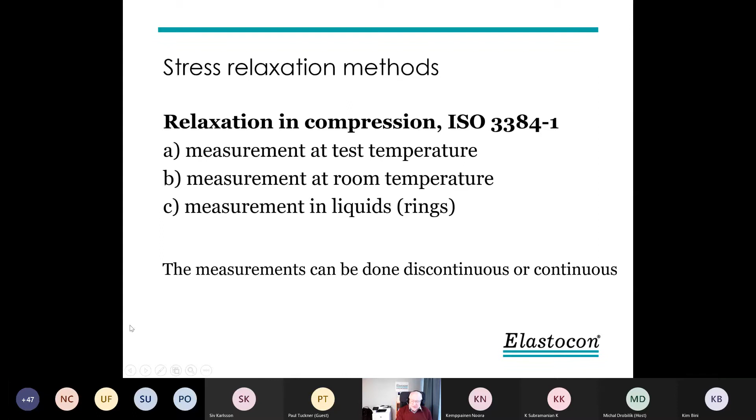So if we look at 6914, that is continuous elongation. That method is in fact called aging. And only method A in that standard is really relaxation, because there we extend the test piece strip, normally 50%, and measure the decay in the force.

Method B in that standard is done in a similar way. We extend the sample, the test strip 50%. We record the force, but then we unload it again, so it's not stretched during the aging time. And at suitable intervals, we extend it again and measure the force at 50% elongation.

And that means we get, in fact, to measure the modulus change. It's not the same as the relaxation. But that is also an interesting thing. It's possible to do in the same instruments, by the way.

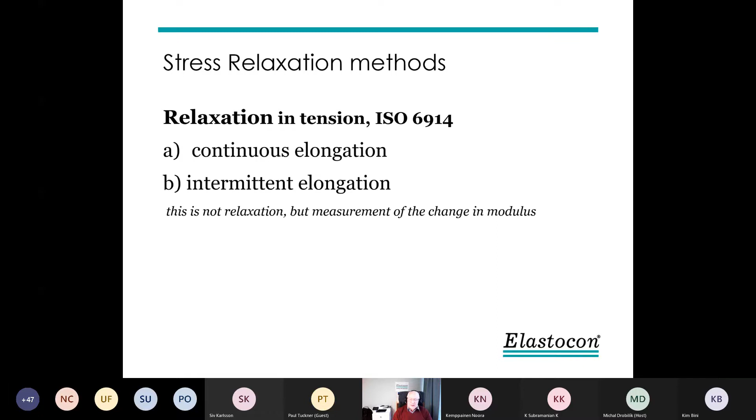If we talk about what happens in our rubber material when we do relaxation tests, or aging, in fact, if we compress or stretch the material, we have first the physical relaxation. That is only a rearrangement of the polymer chains and fillers, which will find new resting positions or places during the compression. And nothing is really destroyed.

It's just the physical. That one we want to get, say, not calculate or count in. We want to look at the chemical degradation due to aging. And the chemical degradation is mainly then that the molecules get shorter. They are affected by thermal aging, oxidative aging.

And it corresponds quite well if you do tensile tests and look at the elongation at break. The elongation at break, if you age some rubber material different times, it always goes down, becomes lower, and that reflects the shorter molecular weight of the aged material.

But in rubber, we have another thing. We can also have some continued cross-linking. If we have not cured the material properly before we do the test, we will also get some extra crosslinks in the compressed state. And that is affecting the result, of course, but not so much as it will affect the result if we make compression set, because there you see it much more.

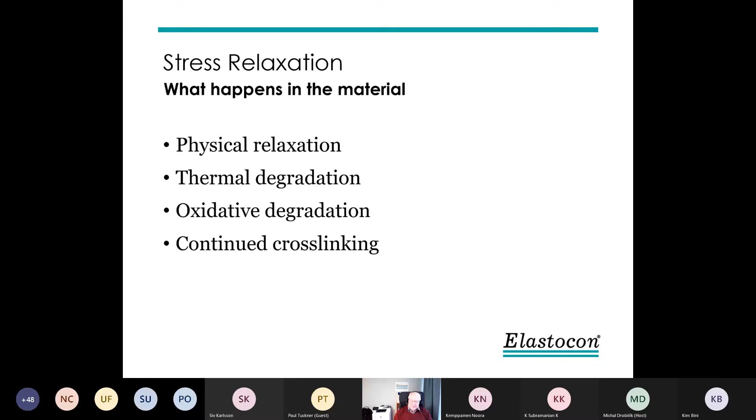The relaxation test was developed in England, and it was standardized in ISO during the 1980s. There were really no instruments at that time for doing this test continuously. I was participating in that standard group, and I worked at the National Testing Institute in Sweden. We found that the best thing is to measure continuously and not discontinuously, because then you get much more errors.

So this was the first design of a continuous test rig. And of course, we also needed a heat source, and we used a cell oven for that purpose. But the cell oven had quite small and deep cells, and it became quite long.

We even started without, let's say, computer software. This was in the early 90s. We recorded on a tape strip recorder, and the longest test we made was 1 year. I'll show that later on, which we recorded on a strip recorder on paper, running at the lowest speed, but still it was a lot of paper to look through after 1 year.

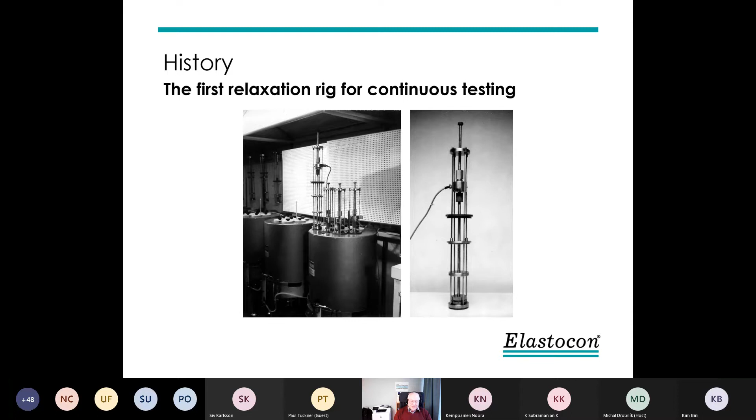The instrument at that time was developed by Wallace in England and was measuring in the test fixture. You see one in the picture here, where a load cell was fitted to a pneumatic cylinder, more or less, and compressed the sample inside the test rig a little, so it didn't have any connection with the spacers anymore.

According to that method, it's allowed to do a little extra compression to get the sample free of the spacers, so the counterforce can be measured. But it is very tricky to get repeatable results.

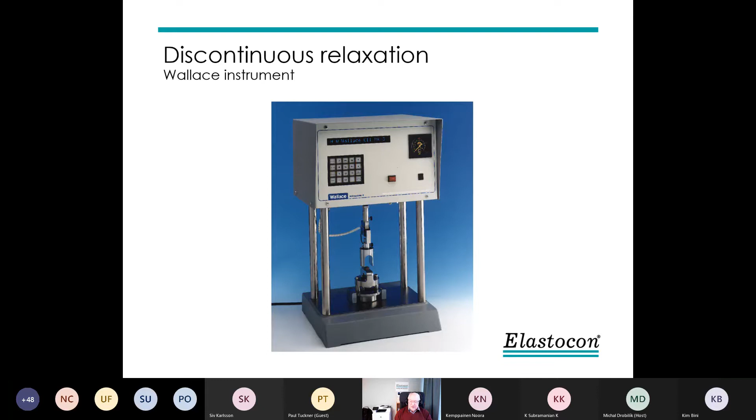That test rig is then put into an oven to make the aging at an elevated temperature, and taken out at suitable intervals. Quite a lot of manual work, and quite a lot of errors can be introduced.

At Elastocon, we developed a similar instrument, but we found some important factors. One was to compress the sample to exactly the same compression every time. We made what we called a compression tester, where we could compress the samples to within 1,000th of a millimeter, the same every time, so we could get more repeatable results. But we have discontinued making this because there is very little request for it.

Method B is also used quite a lot today, measuring in a tensile tester. If you have a modern tensile tester, the elongation measurement is good enough, but in older instruments they are not. You must be able to measure in the range of 1,000th of a millimeter. We'll come to that later on. To the right, you see a test jig for this kind of measurement.

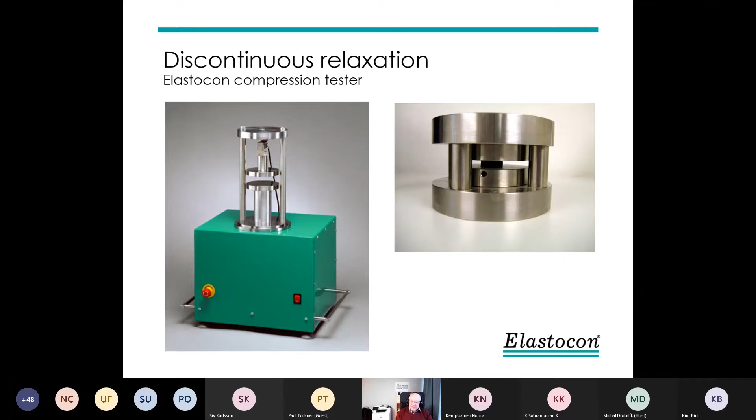Here is a graph from the SAE standard, where this intermittent test is described with a test jig similar to the one we saw before. The way of determining the force is that you measure the force while you make a further compression.

When the rubber sample doesn't have any connection or touch with the spacers anymore, you get another curve, and you take the value as indicated here. The first steep part of the curve is the metal deformation you are measuring, and then it's the rubber deformation. This can be done if you have a tensile tester with a good measuring system.

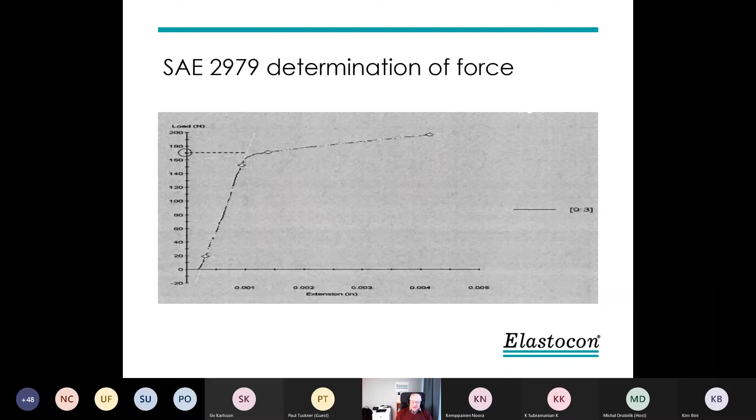The continuous instrument is also a kind of tension-compression rig, but it's compressed manually, because we only need to compress it once when we start the test. We have a load cell and a PT100 sensor connected to an amplifier box to get the values into a computer.

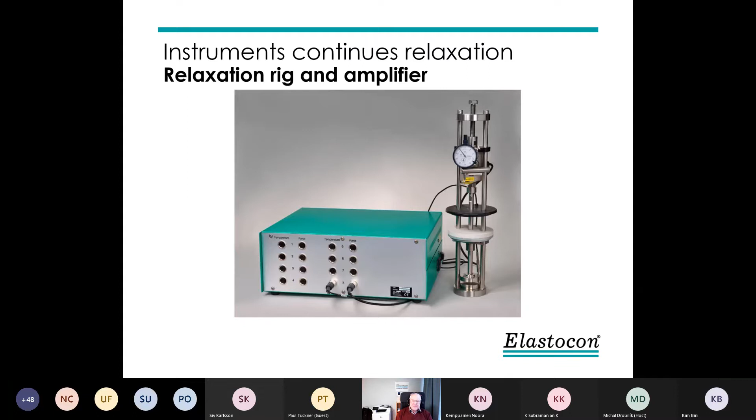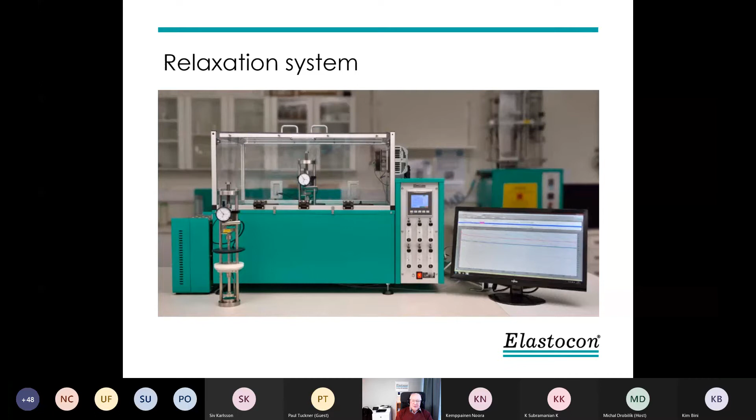It's possible to test in several ways. Compression is the normal one, you see the first. If you test in tension, we use a strip and clamps. And then to test in liquids, we have containers. There are 2 versions of containers.

You can use ones that are not airtight, meaning you cannot test volatile liquids or at high temperatures. Later on, we developed airtight containers up to 3 bar pressure, so it's possible to measure oils, fuels, liquids, and also water up to 145 Celsius. That means 3 bar is the maximum pressure limit we have.

It means we can do method B, where the measurements should be done at room temperature and the aging at higher temperature, automatically—so we don't need to take the test jigs in and out of an oven and do manual measurement.

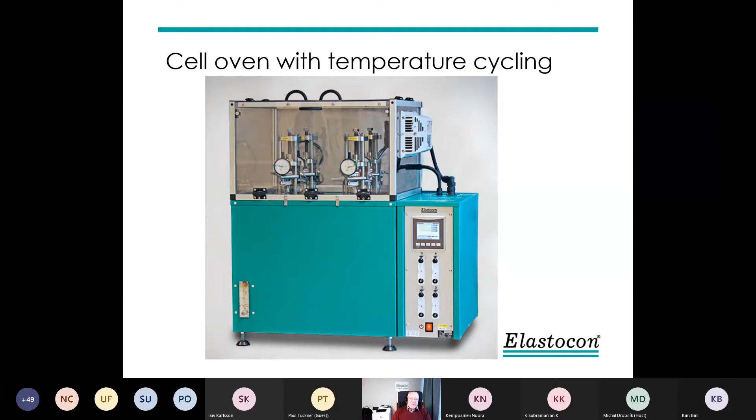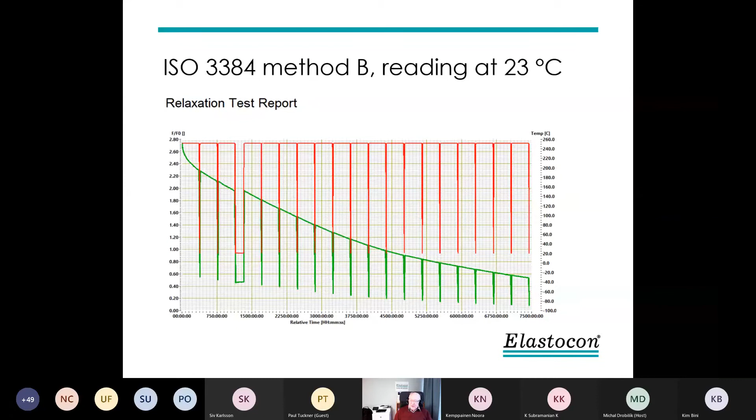The interesting thing is, the value of the peaks, say the downward peaks, they change with time. That has been a bit of a job to evaluate originally, but now we have improved our software, so it's easier to do.

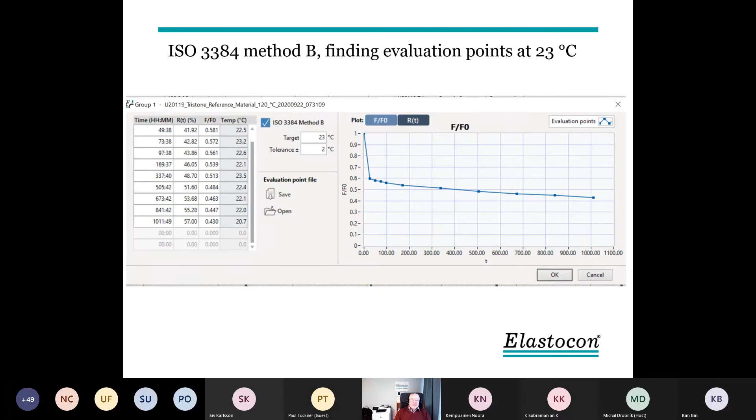We have a function where we let the software find the 23 Celsius temperatures, and then we can get the plot from the times when we want to measure 23 degrees. So here we have, I think, 48 hours, 72, 96, 168, and so on. Then we can get the plot of the force at room temperature, the change in force. Then you can plot the report looking like this.

Here we have, say, when you run method B, you always start at room temperature. You get the original F0 value, if it's possible to see here. So the test starts there.

When we increase temperature, in this case only to 120 Celsius, the force goes up due to the volume expansion of the rubber. Sometimes it can go up to even twice the original force if you go very high in temperature. And then we have the first down here.

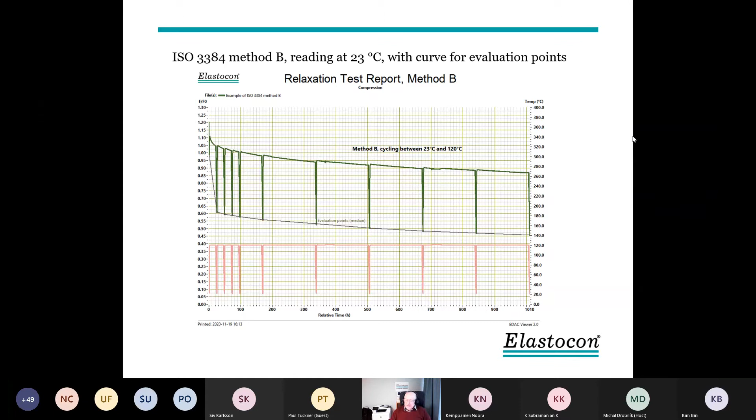So now we can do method B automatically and have the computer find the values and program the cycling in the oven.

Another thing we have developed recently, 3-4 years now, is a project we ran together with some car companies, Volvo and Volvo. We have 2 Volvos, as you may know, and Scania, and the Research Institute in Sweden, looking at the relaxation test of biofuels. Biofuels are much more sensitive to aging than the rubber.

So we need to change the liquid, change the fuel during the testing. And to do that manually is a bit of a messy job. So we were asked to develop an instrument where we can pump in and pump out the oil.

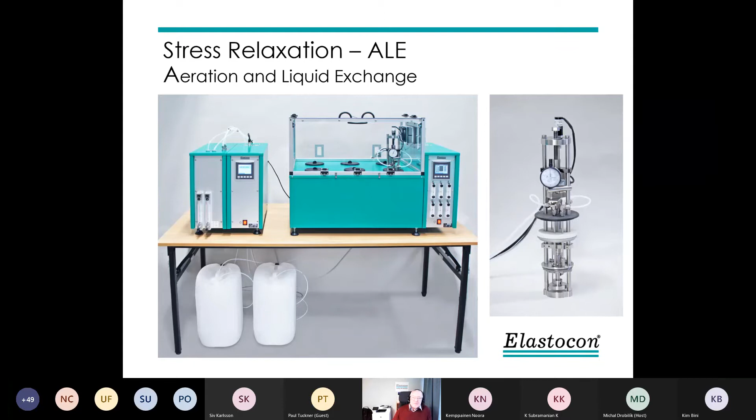We also made a little holder here so you can put in samples, could be O-rings or small tensile bars. So you can do these other types of tests after you finish the relaxation test, but they have been done in the same environment.

This can also be adopted on all normal relaxation rigs. But anyway, here is an example of a test we made with a conventional test in a closed container. Normally, when you test rubber in a liquid, you put the rubber in a liquid and close the lid, and then the oxygen will disappear quite quickly.

But in this case, we had applications where we have air present, and then we added the aeration. And you can see we get much more degradation, more relaxation when we have the air introduced. In this case, it's an HNBR material tested at 140 Celsius in motor oil.

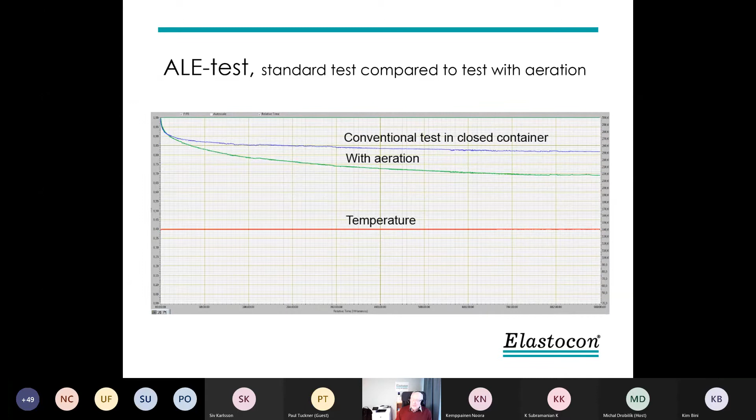So this has been introduced now in ISO, so we can add aeration to the aging of rubber in liquids as well.

If you look at the accuracy of the system, the idea with a continuous system is to avoid touching the sample, moving or handling the samples during the aging, because all that introduces errors.

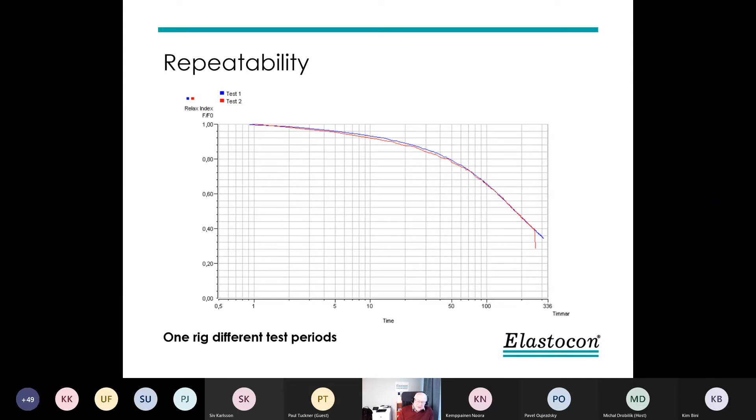Here is a very early test where we tested the same material in one rig at different test periods, and they correspond quite well. The red curve goes down because we let it cool to room temperature, and then the force goes down due to shrinkage of the rubber. The rubber shrinks about 10 to 20 times more than steel, or expands, depending which way you go.

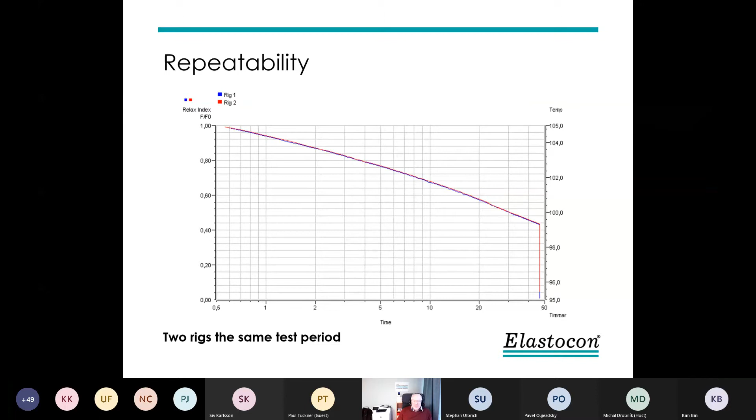Another repeatability test, 2 rigs at the same test period. It may happen that they don't show so accurately, but often they are quite similar. What can happen if you have a difference between the curves can be the lubrication of the samples. If that is not done properly and you get some friction, you may get a little difference in the curves.

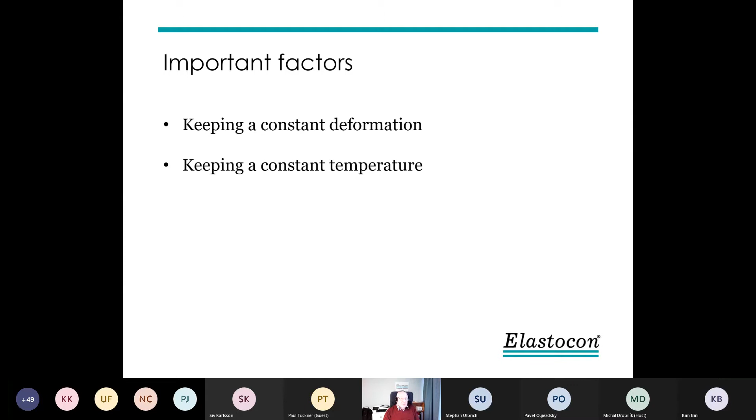We found that there are some factors which are very important: keeping a very constant deformation and keeping a constant temperature.

Here is a curve. The standard test piece is 6 to 6.3 millimeters. If we assume a 6 millimeter thick test piece, normally it's compressed to 25%, meaning 1.5 millimeter. In this case, we measured the force from a sample compressed at 1.5 millimeter and further increased the compression to 1.6 millimeter. On a 70 hardness material, the force increased about 40 Newton for 0.1 millimeter. That means 4 Newton for 10 micrometers.

So we need to be better than 10 micrometers, in the range of a few thousandths of a millimeter, to get repeatable results. But of course, if you have a softer material, it's not so critical. Many seals, though, are more in the range of 70 than 45 hardness.

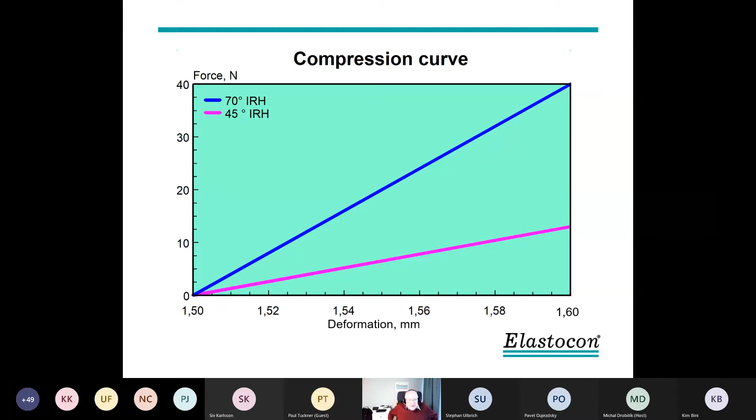In many measurements, you have errors, but if you know about the errors, then you can compensate for it. The error we have mainly is the stiffness of the load cell, and also the stiffness of the whole test rig, but especially the load cell. The load cell is being deformed—that's the way a load cell measures force. It gets a little shorter when we compress something, and when the rubber then relaxes, the load cell will spring out, because it's in fact a very stiff spring, and compress the rubber a little more, and then we get an error.

There are 3 ways of handling this, which we point out in our manuals. First, you can disregard it because you run comparative measurements—you have the same error in all measurements. Or you can do a manual compensation: on the dial gauge on the instrument, you can see how much this has been, and do a compensation after a couple of hours, or after one day.

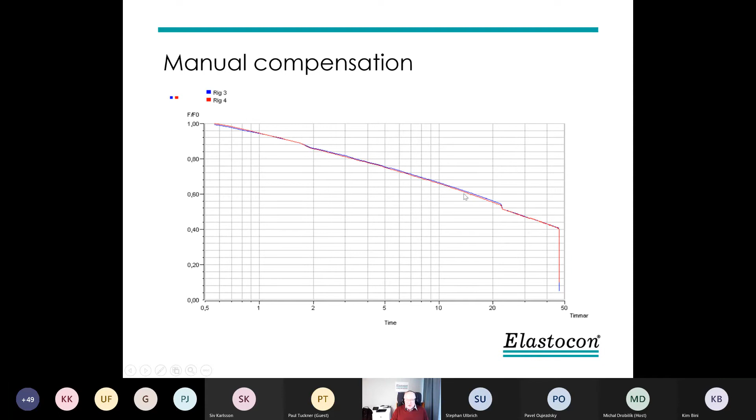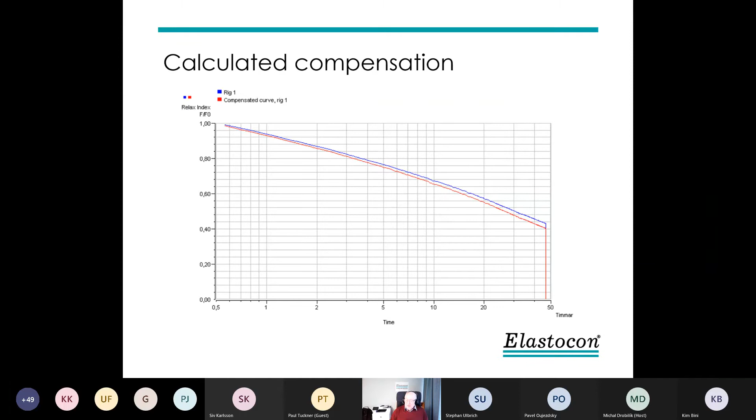Or we have also put in the software a calculation which makes the compensation. There is a compensated curve, that's the red one, and the blue one is uncompensated. So without compensation, you get too good results, and with compensation, you get a better, more realistic result. It's possible to see both of these curves in the software when you do the evaluation, both compensated and not compensated.

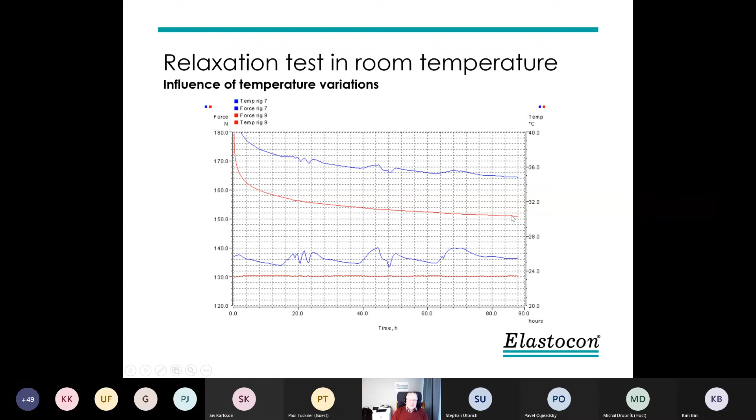In the blue curve up here, we see the force. It corresponds quite well to the room temperature changes, because that is the difference in expansion between the rubber in the test rig and the steel material in the rig. It gives this result, so we need to keep the temperature constant. In the red curve, we have used a so-called room temperature cabinet, where we keep temperature within ±0.2 degrees, and then we get a nice force curve which is not influenced by room temperature. That's one way to eliminate variations.

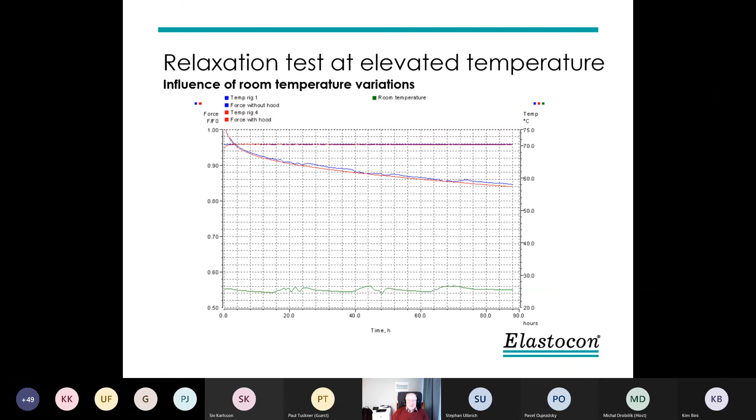So if we also manage to control the temperature on the upper part of the rig, we get the red curve, and we can get a stable reading.

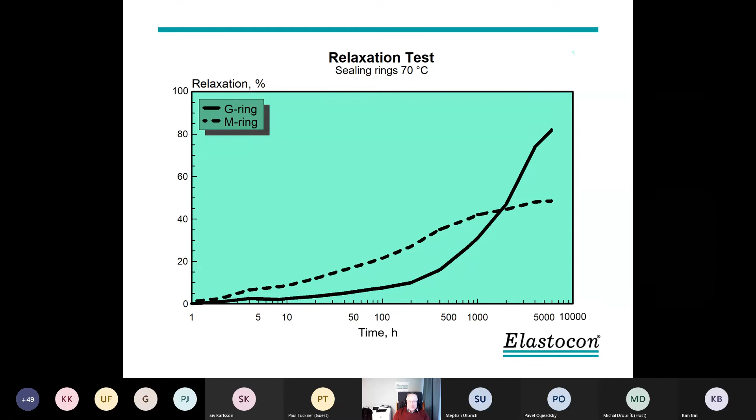You can do this type of evaluation and do the elongation at break, or compression set, another property which is important for the function of the product you want to use the material for. And we determine this value as a function of time. The testing is continued until we have reached what we consider to be end of life or something like that.

That's always the difficult thing, to know what is end of life, when it doesn't function anymore. If you don't know that, 50% reduction is normally used. And then 2 more tests are done at other temperatures, and then we can do a so-called Arrhenius plot.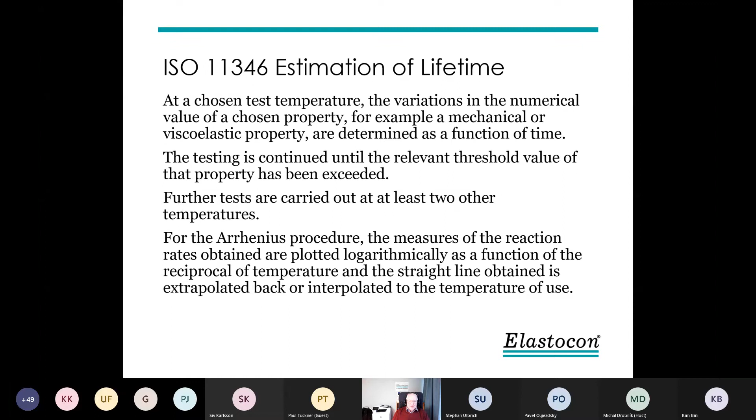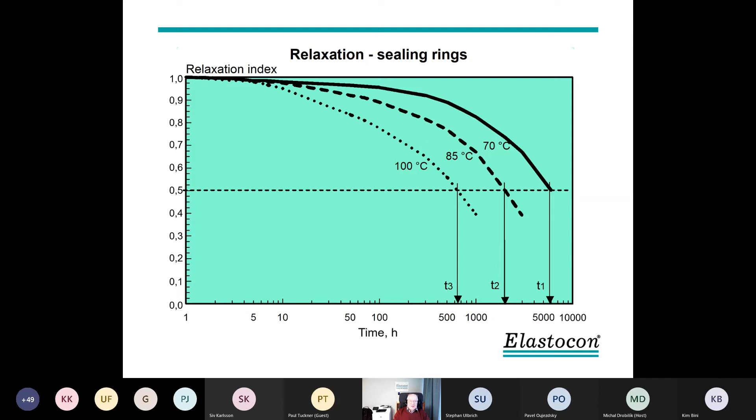Here we have still the same type of sealing rings, these SBR sealing rings. Tested at 3 temperatures, we found at 50% relaxation 3 time-temperature points, T1, T2, T3. These were then inserted in an Arrhenius plot, which is a graph where we have on the x-axis 1 over absolute temperature in Kelvin.

But we show Celsius here, we show better graphs later. The time is shown on the y-axis in logarithmic time. So according to the Arrhenius formula, this should be a straight line. And then we can do extrapolation to a lower temperature. But of course, the further we go from the lowest test temperature, the more uncertainty we have.

But we can get 2 kinds of information. We can get the lifetime. We say we want a lifetime at 30 Celsius, that is around that value.

Or we can also say we want to have the maximum temperature of use, and there we put in a time of 20,000 hours. That is used by the electrical industry, cable industry, to specify the max temperature of use. That is 2.5 years. And if we use that, we find that this material is not really good, much over 50 Celsius.

But if we look then at the car industry, they often only use 1,000 hours, and that is down here. If we use 1,000 hours, then the maximum temperature use is 95 something. So if you see a figure telling you what the max temperature use is, always ask how long, for how long time. It's often not 2.5 years.

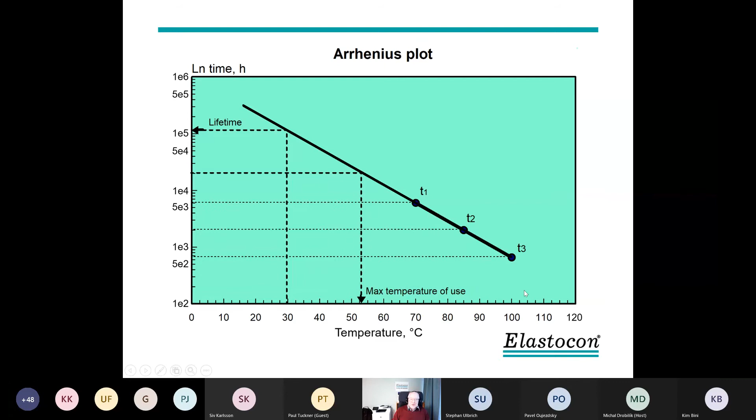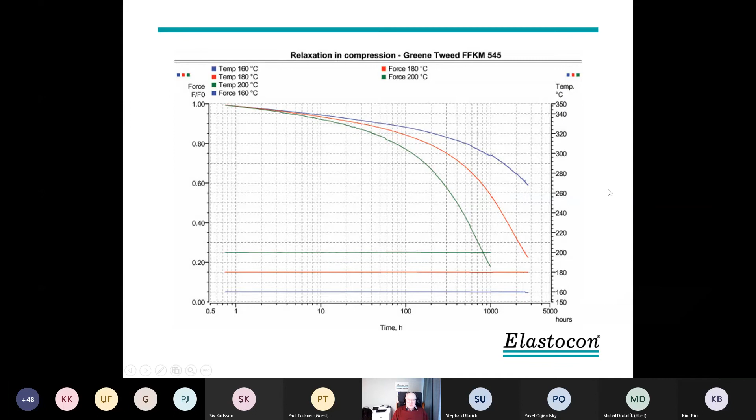Here we have a material we tested a long time ago. It's a perfluororubber, which I think is the most expensive rubber we have. We tested quite a long time at 3 temperatures, 160, 180, 200 Celsius. We had the force graph looks like this. The lowest temperature of 160 didn't reach more than 40% relaxation.

So then we plotted Arrhenius plots for this, both 40% relaxation and 50%. For 40%, we had 3 values and got a nice straight line. For 50%, we had only 2. But if the 50% line follows the 40% line, I think we can still use the data for that.

This is plotted in software we made in our company, because we found it impossible to make a graph in Excel which shows what we want to show. For example, here we have 1 over absolute temperature in Kelvin, but these figures don't tell you very much. So we put in another axis with Celsius temperatures, which is not linear and not logarithmic either. But now at least we know where we are. Then we can have a cursor here.

We can find out the lifetime at say 70 Celsius, and there's quite a difference in lifetime between these two, 40 or 50% relaxation. We also can calculate the activation energy, and we can see the coefficient of determination, how good the line is. Normally we get quite good lines. So in this case, we can get a better estimation of the lifetime of the material.

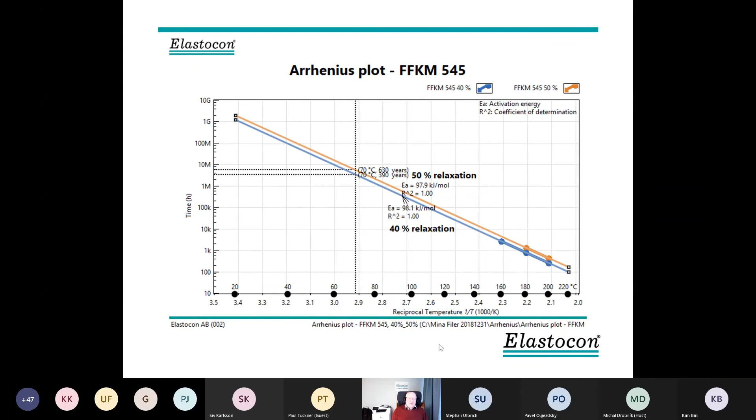So even this fantastic material, at least expensive material, does not last forever.

Some other data here is fluororubber. We tested 2 different fluororubbers. You see, it's not always you get the 3 points in a good line. It happens, and often the reason is that the highest temperature is too high, and then you don't get the straight line. But the interesting thing here is to show the difference between the 2 types of fluororubber. One is better above 150 Celsius, and the other is better below 150 Celsius. So they have quite different activation energy.

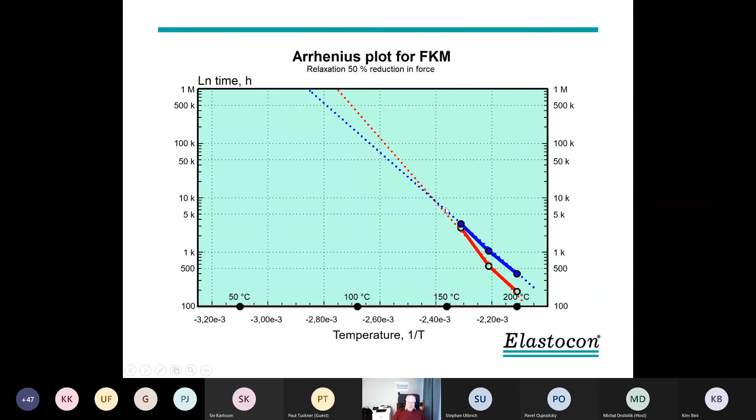The same thing with comparing EPDM and thermoplastic elastomers. They show quite different activation energies, and TPE materials are quite often better than EPDM, in fact. It depends, of course, on the type of EPDM, the curing system, and other things.

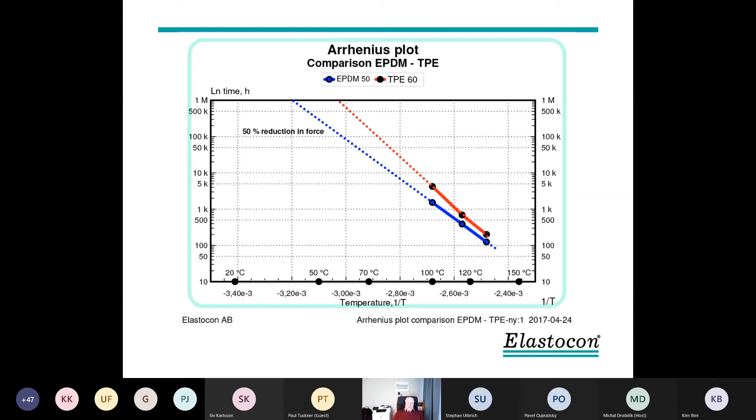We've done quite a lot lately in the last 3-4 years. We tested quite a lot of relaxation on sealing rings for water pipes, for water or wastewater, not hot water. We have a lot of pipes in the ground in all cities, and they start to leak, or have done for quite a long time sometimes, because originally we had natural rubber seals and they don't last so long.

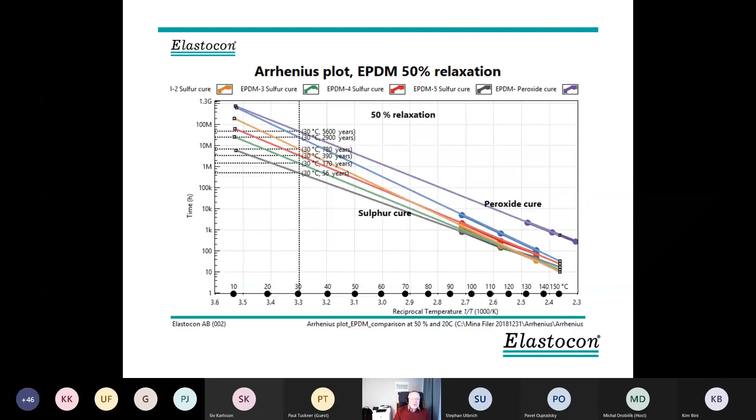But please note that we have gone down to 50% relaxation. We believe that a sealing ring in a water pipe with quite low pressure difference will function up to much higher relaxation figures. But this gives a good comparison between the materials. We can still make a quite good SBR material, which is, I think, as good. This was at 30 Celsius. A good SBR can be almost in the same range as a poor EPDM.

Then we have another type of testing with relaxation, part 2 of the standard, where we have introduced temperature cycling. In the ISO standard, we have method A: we do it once a week, going down to sub-zero temperatures to see if you still have some sealing force. We can also do method B, where you do more continuous cycling, so you get a bit more of a dynamic effect as well. This was requested by the automotive industry, and General Motors have been the leading company there.

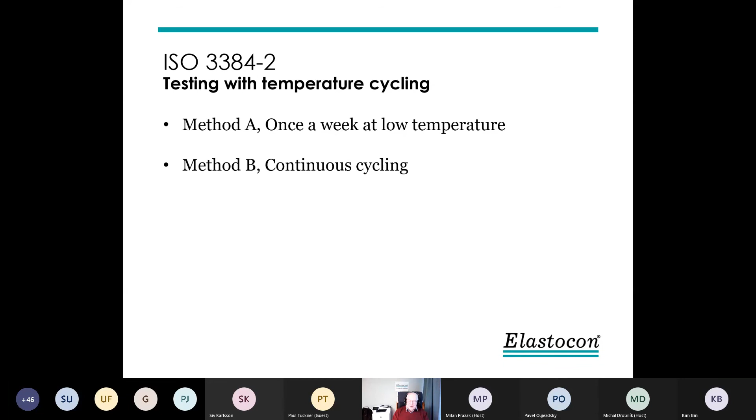They have had for some years now a test cycle, which I will show later on, which is quite difficult to meet. Volvo trucks have a similar cycle, but a much shorter one. And it seems more people are interested in this sub-zero testing, because there we also get a lot of the effect from shrinkage of the rubber.

But method A is like this: you go down once a week to see if you have some force left or not. That is the temperature cycle.

Or you cycle as fast as you can. Every time you go up in temperature, the rubber will be more compressed, and every time you go down in temperature, it will be released. It will be a slow dynamic cycling as well.

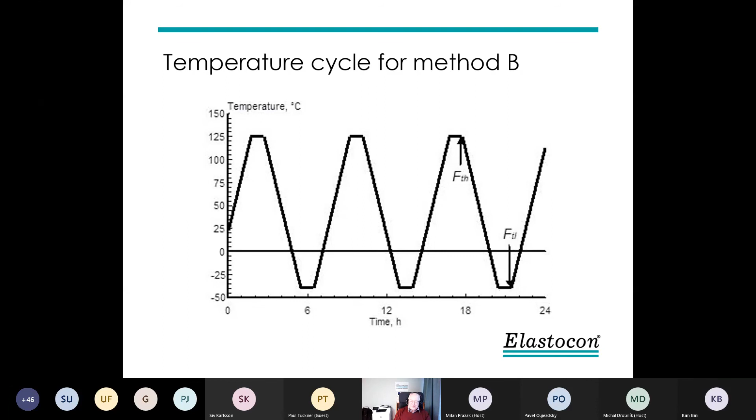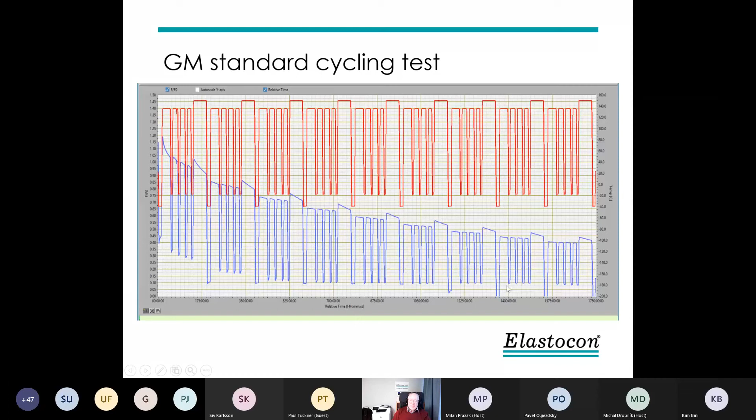The 3 last cycles are down to 0 counterforce at -40. We still have some counterforce at -18. So this is a quite tough test.

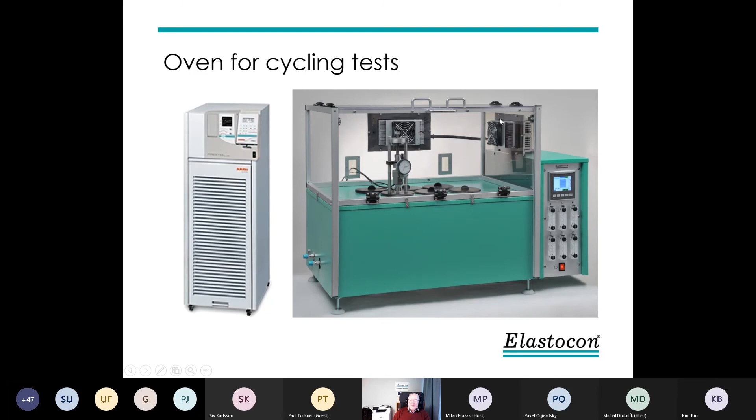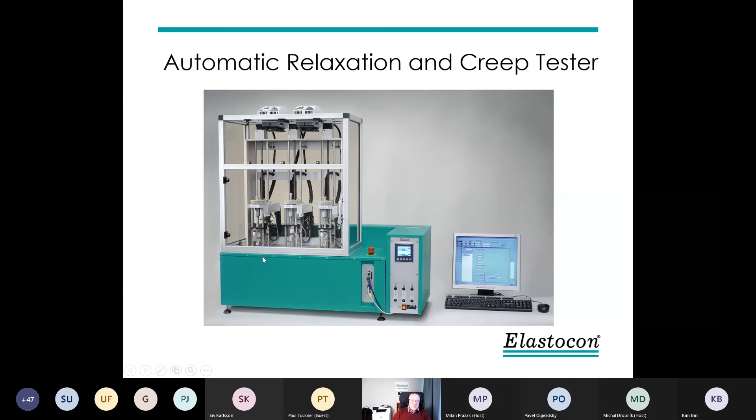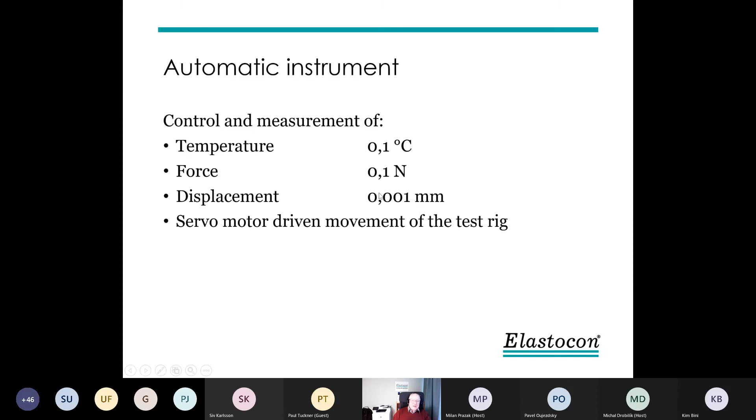There's little data here. The important thing is if we want to measure creep especially, which we can do because we can set it on a force level and keep that force level and measure the creep. We have an accuracy of 1/1,000 millimeter and a resolution of 1/10,000.

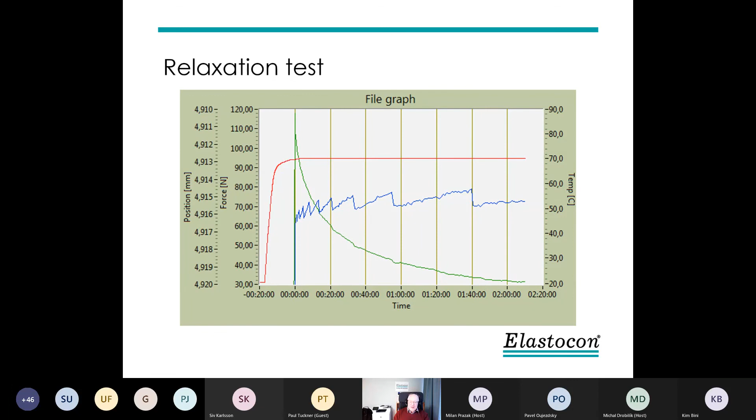Before I leave this, I will mention one more thing we have made: in our relaxation rigs, we have done a creep fixture we can fit in a relaxation rig. So we have in fact been running relaxation tests on plastics, but in bending mode, in flexural mode, using the creep fixture.

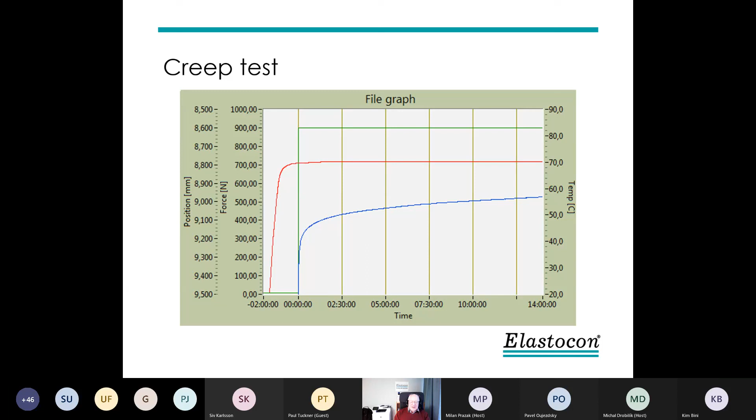And that seemed to work for quite hard plastics, doing the test in a normal relaxation rig. That is then the kind of measuring creep, but measuring the force instead of the elongation.

So we believe that stress relaxation tests are very effective for conducting aging tests, as we get quite a lot of information with little effort. And with effort, I mean man hours, especially if we use a continuous measuring system.